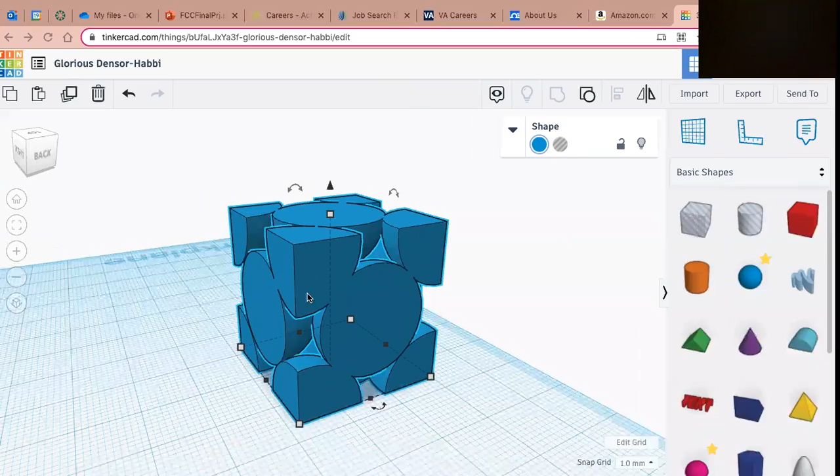And I can show a little bit better detail. So obviously that image before was a little simplified, so you could actually see what was going on, but they won't be this small. They'll actually be much tighter packed. So here's a unit cell of FCC structure, and we've got 1/2 of an atom at each of the faces. And then we've got 1/8 of an atom at each of the cube corners here.

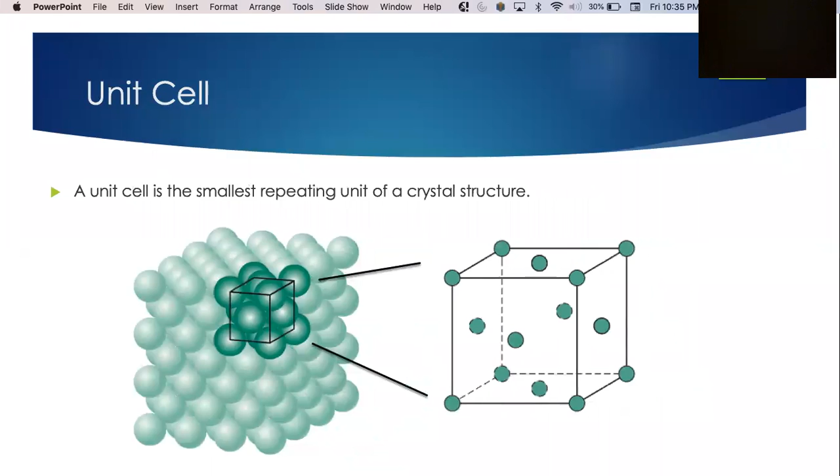All right, so atomic packing is how tightly the atoms are packed together within a unit cell. The atomic packing factor is a value that helps us quantify how tight the atomic packing actually is. And it is going to be the volume of the atoms present in the unit cell divided by the total volume of the unit cell. So if we look at our model again, you can see there's a little bit of empty space in between the atoms in the unit cell, and we want to know basically within this cube how much of that space is atoms as opposed to being empty space.

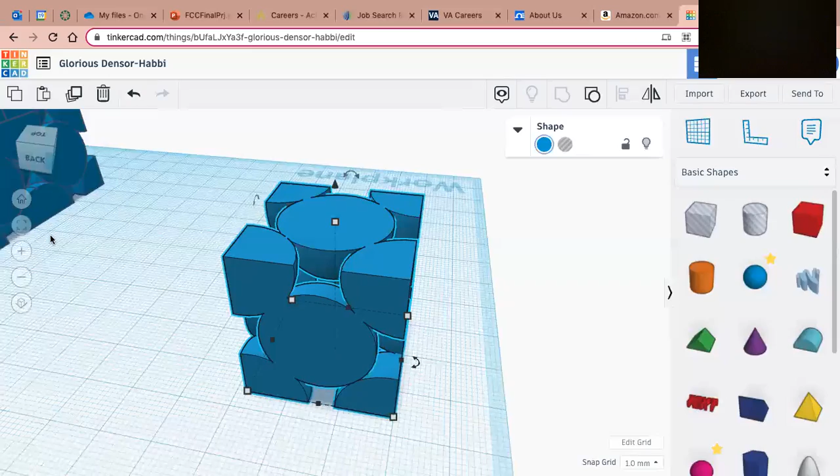Okay, so as you can see with the FCC structure, it looks like a pretty tight fit, and let's see exactly how much it is. We can label each of the cube edges or cube sides as a, and because it's a cube, all sides will be the same length. And the total volume will be a cubed. However, we don't know exactly how much a is because of that gap. So this gap here would be unknown for the unit cell that we're looking at here.

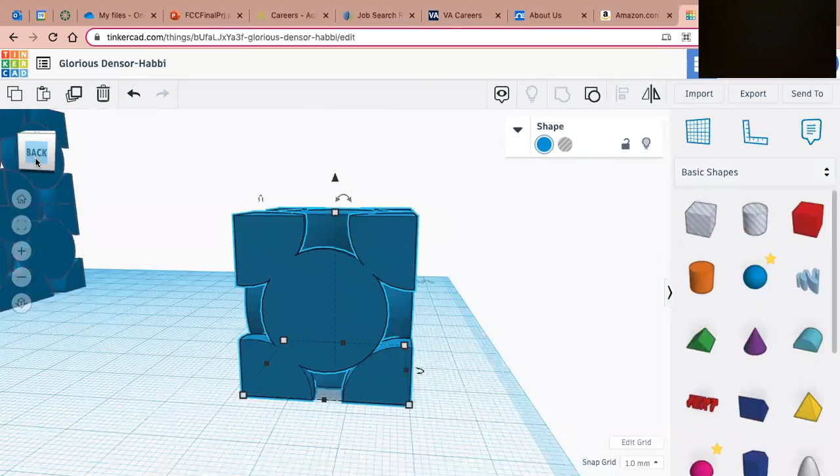And then if we look at our model from the top, we can see that that is the center of one atom to the edge, the entire diameter of this hemisphere, and then the edge of another sphere to its center. So that'll be one radius, two radii, and one more, making it 4 times the radius.

Okay, so now we know from trig that a right isosceles triangle, or a triangle with a right angle and 2 sides of equal length, will have a hypotenuse of square root of 2 times whatever that length is. So our length is a, and our hypotenuse is square root of 2 times a. And we also know that that is equal to 4r, and this gives us a little equation that we can use to relate the radius of the atoms to a.

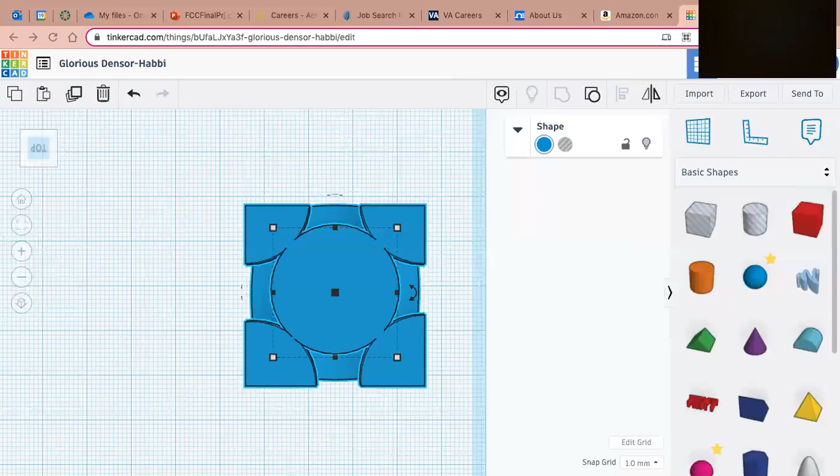Now, the numerator of the equation is the number of atoms times the volume of the atom. So as we talked about before, the number of atoms in the unit cell, we can actually count it. So we've got one hemisphere at each face, and that's half of a sphere at 6 faces, meaning 6 times 1/2 is 3, that's 3 atoms. And then we have 8 corners here, and they each have 1/8 of a sphere. So that'll be 1 atom. So altogether we have 4 atoms in the unit cell.

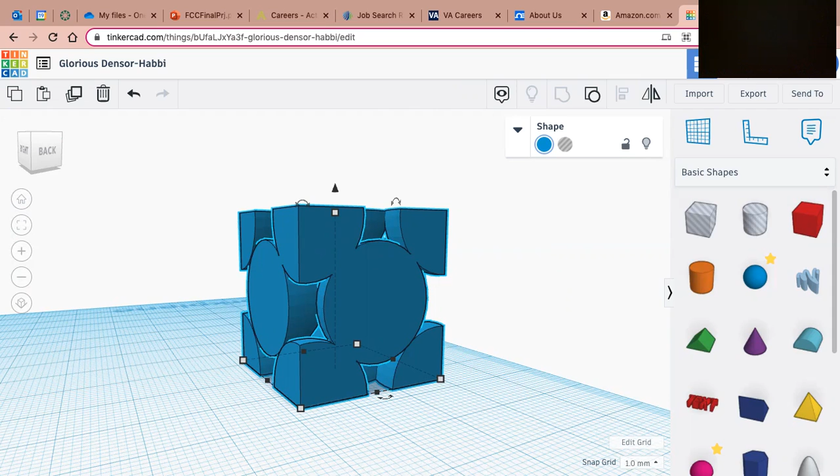And then we're going to multiply that by 4/3 pi r cubed in our equation here for the volume of a sphere, except we're going to replace r with what we found it to be equal to in terms of a. So that'll be square root of 2 times a over 4, and then we're going to cube all that. That'll be r cubed, just so we can get this equation in terms of the same variable.

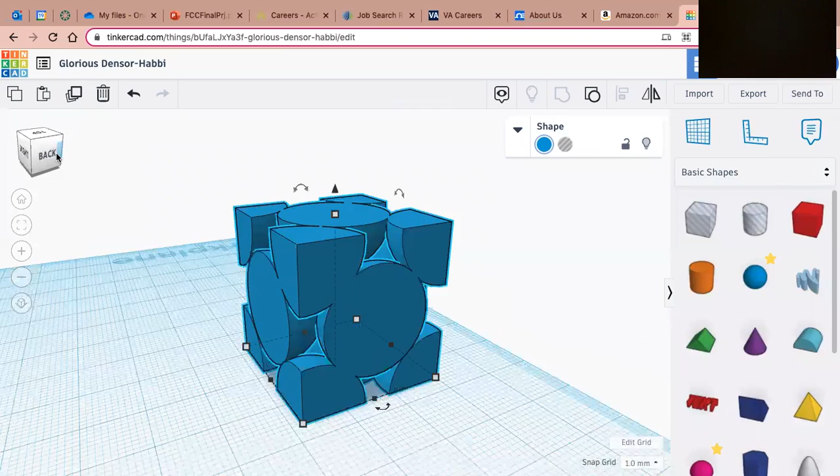Now, FCC structures have the highest possible packing of spheres with an APF of 74%. So most of this cube, 74% of it, is actually atomic mass, and then the spaces here will be the other, like 26%.

Okay, and some common types of metals that have FCC structures are aluminum, copper, gold, silver, also a certain type of iron. They are very commonly used due to some of their important characteristics. Some characteristics of these metals are that they are very strong, ductile, meaning they are bent or shaped easily without actually breaking. They have a high melting point, and they are tough, meaning that it requires more energy to break them. Hence their wide range of applications. Many of their other properties can depend on the elements that are involved. So what exactly the atoms are, the purity of those atoms involved, and temperature, etc.